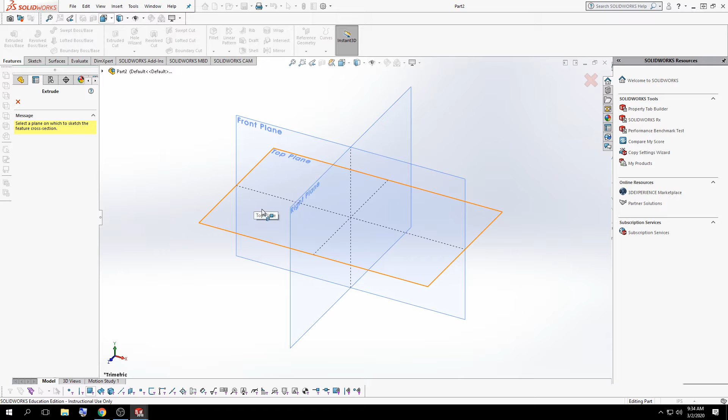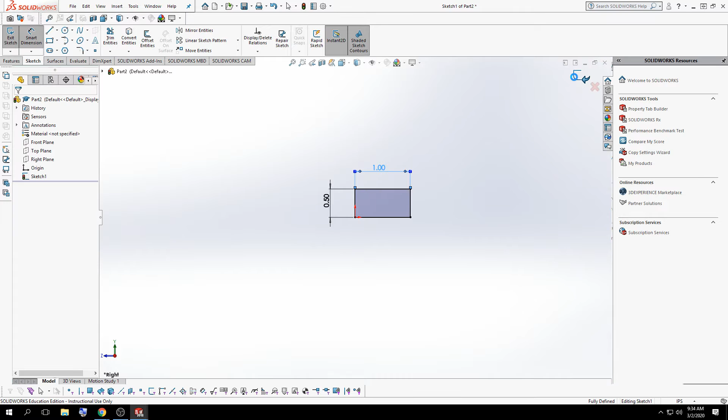So, once again, complexity through pattern. We're just going to quickly make a part, which you all know how to do. I'll make a quick extrude boss base, a rectangular extrusion on the right plane. I don't particularly care about the size, but I'll make this a half inch tall, 1 inch wide. Once again, I'm just demonstrating how to do a pattern. I'll do a circular pattern in a second, but first I need something to create objects on, so let's make this 6 inches in length and say okay.

So once again, we're trying to just make some patterned complexity. If this was a texture, if this was an extruded hole, if this was something like on a spaceship or whatever, and you want to see a pattern - remember, this is non-technical, I just want to show you how to make the pattern. This is how we're going to do it.

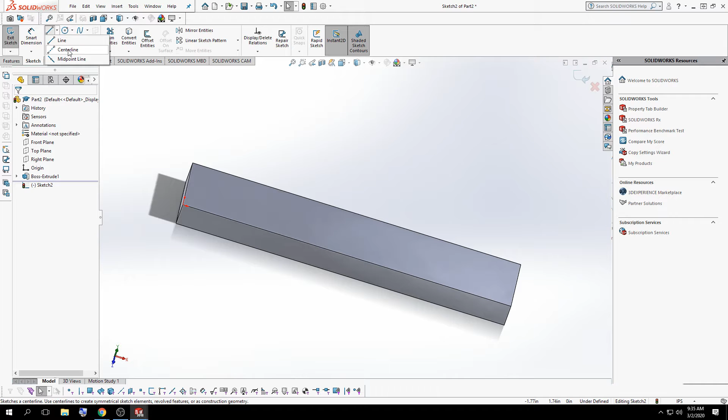So first, we are going to do a sketch on this surface - a sketch pattern that I'll maybe extrude cut or extrude boss base. First I'm going to create a center line, which isn't going to be geometry or part of my model, but it's going to be a guiding line. I snap it from one end of my part to the other, where this pattern is going to take place on this linear path. It's a center line so that it's hidden - SolidWorks doesn't think it's actually part of the model geometry, but you'll see how I use it in a minute.

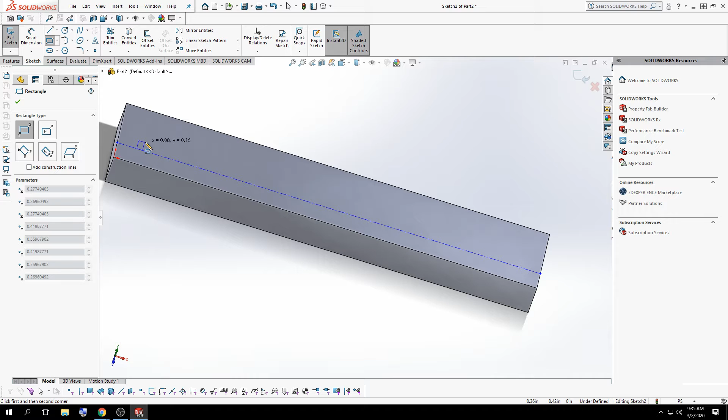I'm now going to make some sort of geometric shape for today. It's just going to be a simple rectangle, or we'll call it a rectangle. I'm not even going to dimension it.

At this point, when we're going to do patterns, you can take a look here - we have linear and circular. We're going to choose linear at this point. It's just going to ask a few questions: what is the thing that you want to pattern, what direction do you want it patterned to, and then how many of them do you want? Simple as that.

So I'm going to go to linear sketch pattern. Over here on the left, the x-axis is already selected. I'm going to clear this at the moment, and if I want to select a specific line, I can click an edge of the part and it would go that direction. So this area here is the direction that you want the pattern to propagate in.

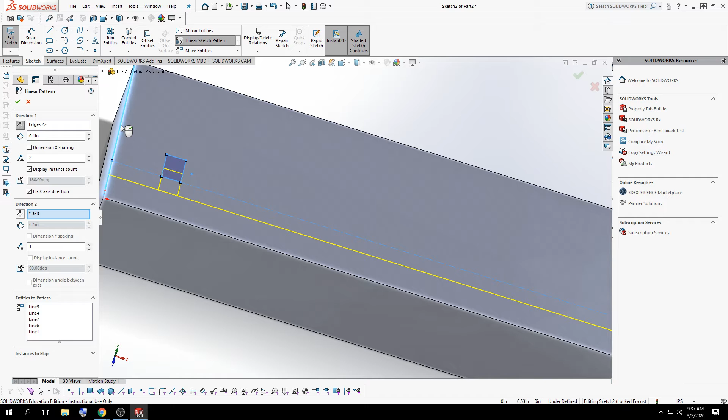So I'm going to hit delete and choose my hidden line. There we go - no, it is selecting, unfortunately, my shape and the line to go in the direction that I want, so I don't want that. As you can see, it's bouncing on both sides because this line is selected, which I don't want. I'm going to quickly click X because it's too confused at this point.

We're going to go back to linear sketch pattern. It's going to ask the questions: we're going to click this line that the direction is going to take place on, come up with a number of how many we want, and then also choose the objects that we want to pattern. Right now it has my line - I'm going to delete this, clear the selection, and I want this: 1, 2, 3, 4. That would be the shape you'd want to create multiples of, because it's going to create a lot of work. And the direction it should go in, let's clear the selection, should be this line.

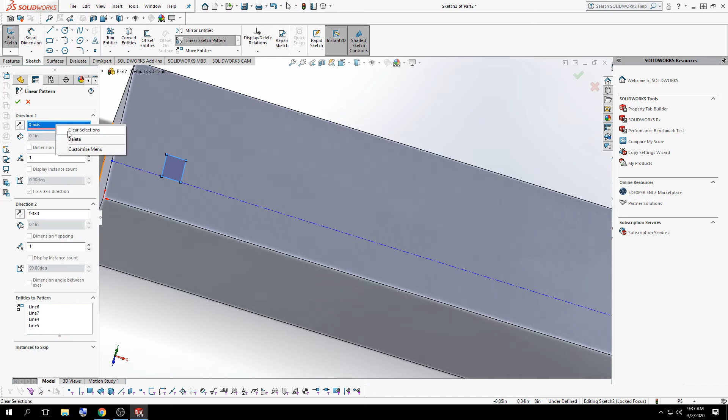And it should give us an arrow and an indicator. I don't know why it's not... Let's click the edge of this part. Still not doing it, it's always fun to see. There we go. Make sure you have a multiple here.

Now this 2 is misleading. It is the number of things you receive, including your original. So if you wanted 3 in total, you would put 3. You wouldn't add 2 and assume that the first one was already there.

And then the direction, it can go either side. So if I zoom in, you see that arrow. You can go this way, you can go that way, or you can go a second direction. So you can create horizontal and vertical arrays 2-dimensionally. So if you need to make 10,000 squares this direction and that direction, it could create the array of them.

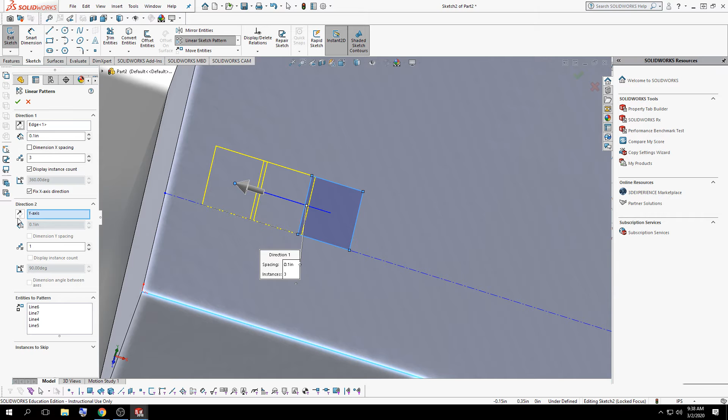So I'm just going to figure out the spacing between them, and here's the spacing between them, right? Let's go the other direction so you can see it. So if you needed a lot of space between them or you needed them fairly close together, I'm going to do mine close together, because I want to show the varied complexity of this demonstration.

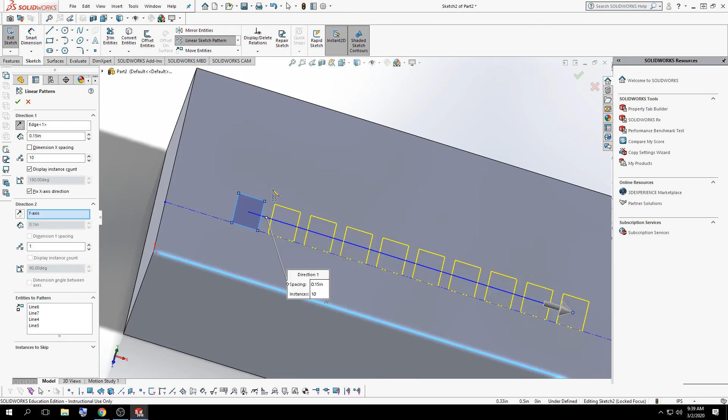So let's just zoom up or out and create. I'm just going out, I wouldn't want to draw all these, right? And then let's go a second direction just for fun. Hopefully this works, click this.

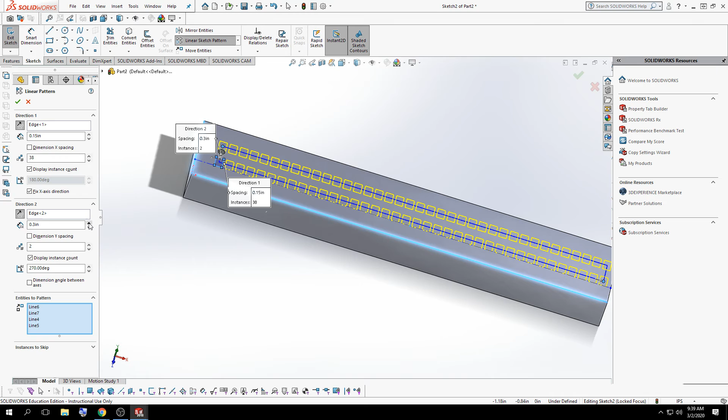And then let's give it the same, not the same spacing, 0.3. Let's see what 0.3 looks like. And let's go the other direction. Up, oh that's the distance, 0.3. All right, I'm just going to say OK.

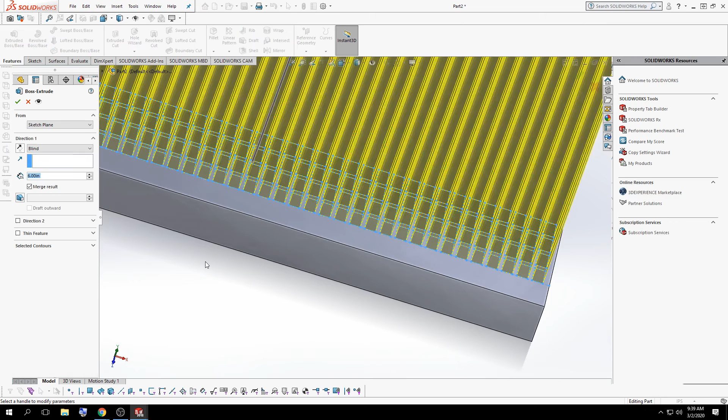And at this point, I have a ton of sketches that create the shapes of the things I want to do, so I can now take this and apply an extrude boss base to it. Obviously, when you do this, though, you're going to increase tremendous amounts of memory consumption of your computer, and so you can crash the computer when you do this. So I want to warn you, when you do this, save often, because if you don't, you're going to crash your computer and lose a lot of your work.

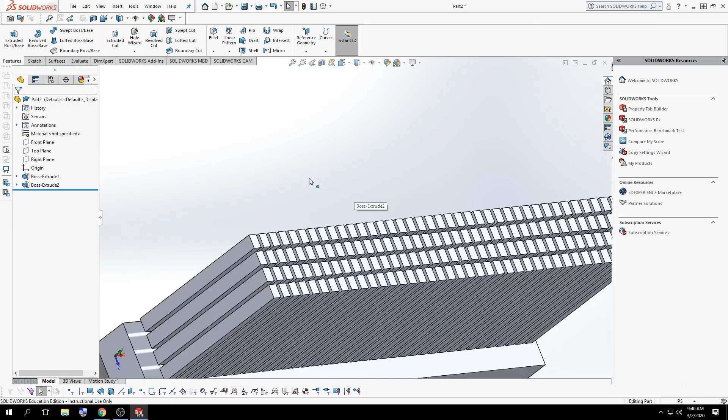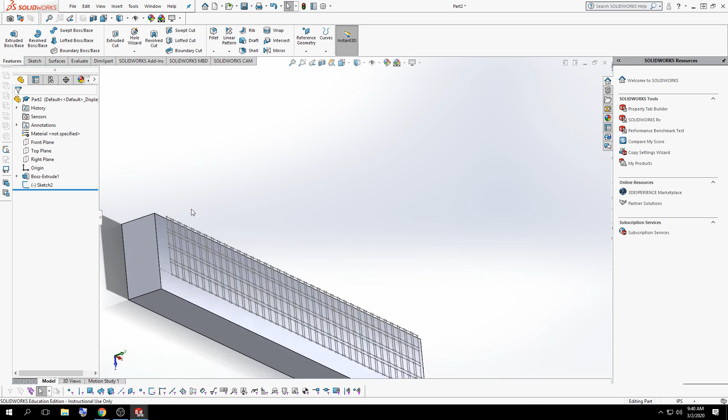So if you take a look here, regardless of why I needed to do this, it's geometric complexity, and I wouldn't necessarily want to have to create that. But I used an X and a Y pattern at a distance and a specific number. This could be any shape you want. These could be extrude cuts instead. And the whole point of me showing you this, obviously, is just to save you some work.

Now we could do this exact same thing and the same purpose when it comes to circles. The only difference is instead of picking an axis, you pick a center of rotation and then a number of degrees that the rotation takes in.

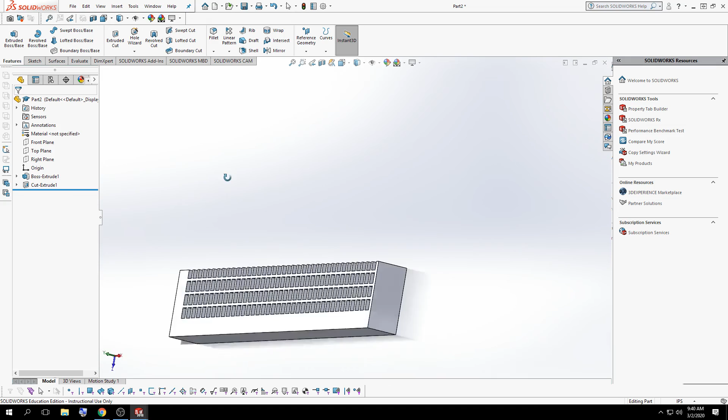So if you take a look here, why would we need this? At the moment, it's just hypothetical, but maybe we're trying to grow bacteria and we're trying to increase the surface area of this object so that we have more bacteria per square unit of measurement, right? Why is that important? It's important in fish tanks, right? If you have a specific type of bacteria that eat the fish waste, the more bacteria, the better biological situation for waste consumption exists. So there's an engineering reason why we would need it.

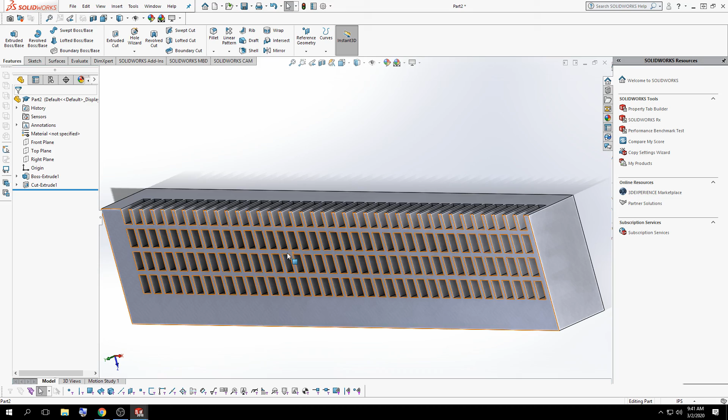But I just wanted to show this and document it so that you can kind of review it. Okay, so this was gone over just a little bit. It's 8 minutes and 15 seconds, so I'm going to stop. And I'll record a circle one later, but I think you could probably figure out circular pattern on your own.

Okay, but this would be interesting to see the 3D printer make. So the idea is you're making something of kind of just mental, artistic creation, unless you can come up for a reason why you'd need something like what I just created. Okay? So there you go.